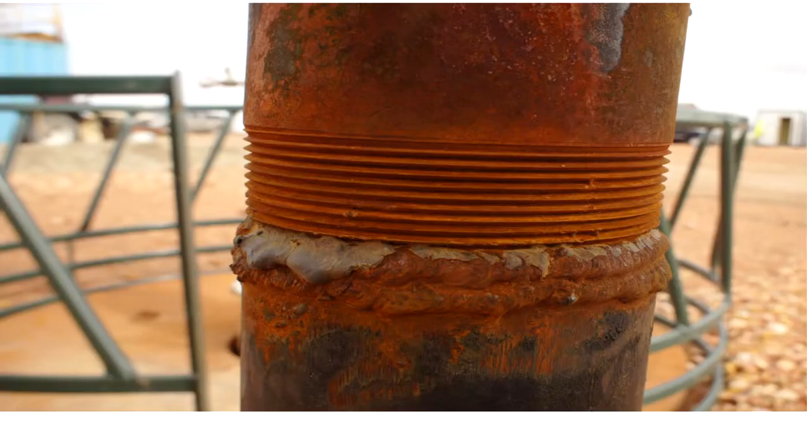This was a weld I saw at a place in Montana last year. I bought into and invested in this water well, and this was their high pressure injection line. When I saw that, I about went bananas. And why would you not want to do that? Geez, I wonder what the joint looked like.

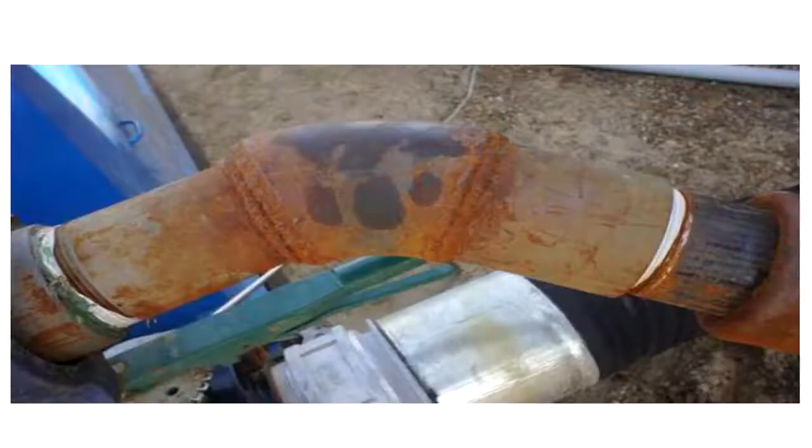You're all welding instructors. Now let's see here, what's wrong with that one? This is a 3-inch nipple going into a 4-inch, 45-degree elbow welded onto a 3-inch collar. What a nice job. Anyway, I try to throw a few of these good ones in.

My name is Larry Zirker. I worked 5 years in the oil field as a pipe welder, used to wear my funky little hat. People just don't know how to wear these hats right. I gave a few away, and the first thing they do is this to them. I said, no, you wear them poofy like this. They said, why? I said, well, in Wyoming it's always either cold or snowing. You pull it down over your ears and weld on the pipe, and it's poofy so you can protect both ears. So if somebody gives the correct answers today, I got a hat here for you. It's custom made, old school design, reversible and everything.

Retired welding engineer, 30 years with the Department of Energy, welded nuclear fuel rods. That's why I have a radiant face. But worked on airplanes, did a lot of things, lectured, taught at a couple of universities, and now I just lecture. I've been doing this.

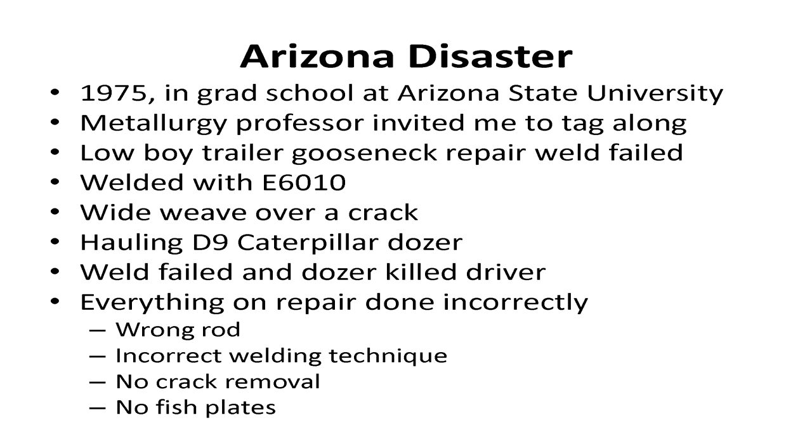I've always wanted to tell this story because I can see a teacher like you teaching a young man how to weld. He goes on to a shop, and the foreman says, hey Joe, get some 60-10 rod and go out and fix the crack in the lowboy. What I'm going to do today is try to give you everything I've got here. You can have it, you can download it from my website, I'll give it to you, but I've got slides and backup material.

That you can give a couple hours of lecture on it and train your people that when you go out and do something like a lowboy that you know has different material, but they just tell you to go out and do it. Maybe you can stop somebody from getting hurt. So let's get on with it.

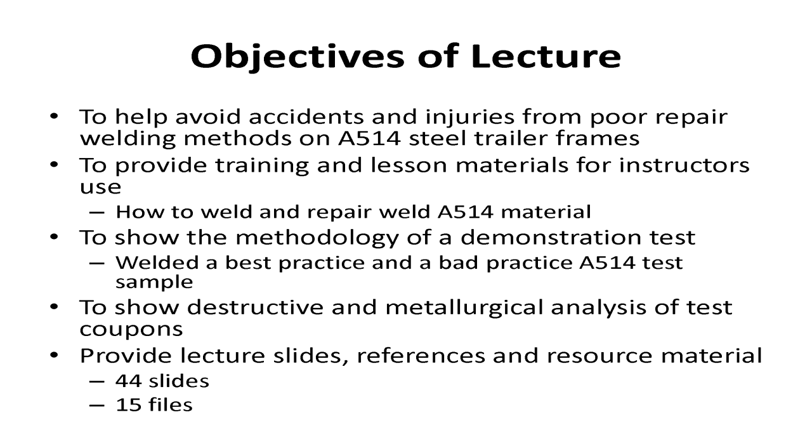So the objective is to help someone avoid accidents, to provide you lesson material. Have you ever used my stuff in your class from last year? No. Oh, the other guy did. But that's all right, that's your problem. No, maybe you might use some of this. He liked some of this stuff.

I'm going to show you how to weld it and to repair A514, which is the same as T1. We've all heard of T1, but you may not have ever heard of 514. I'll show you the methodology of how I did a demonstration test with a best practice and a bad weld, bad practice, best practice, and show you the metallurgical and destructive analysis. Boy, you're gonna love this. And then I'll give you all the slides.

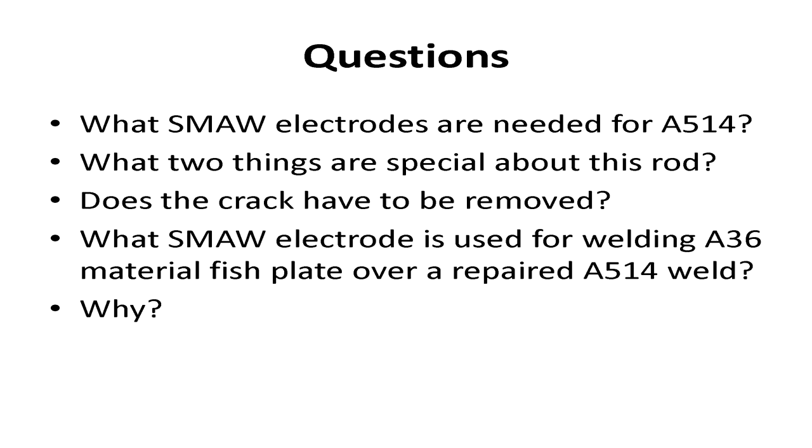You need low hydrogen rod, don't you? Yeah, well, okay, which one do I use? There's probably 10 of them, isn't there? Or 5? 7018? Okay, wrong, that's all right. 8018? No, okay, just as wrong. Just as wrong, but higher tensile strength. Yes, okay, we've got a lot of slides to go through, so let me do the answers.

Okay, you've got to match the base metal. 110, wow, this is T1. This is 110, 120,000 tensile strength material. It's got to be heated to drive off the moisture. You've got to have heated rods, free of moisture. You've got to use low hydrogen rod. Depending on the thickness, depends on the heat. You've got to totally remove the crack, because cracks will grow, and you've got to use a stringer bead.

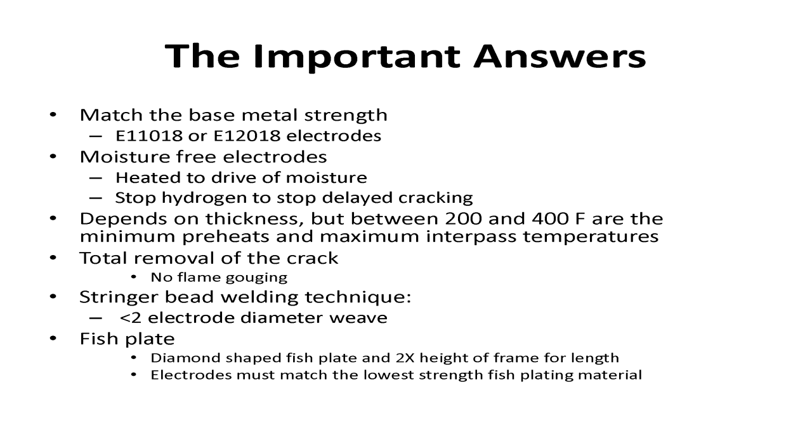No more than 2 electrode diameters wide, 2T wide weave. And when you fish plate, the fish plate should be 2 times as long as the height. On your fish plate, I have a question because I've done trailer repair, and I put them in a triangle type method, is that correct? That's exactly right. Okay, what kind of welding rod do you use to weld the A36 fish plate onto this high tensile steel with?

What did I use? What should we? Now, you're welding this onto a high tensile strength frame. What kind of rod should you use? Wrong. If you put the high tensile rod onto this A36, it'll break out the weld. You use 7018. You match the welding rod to the lowest tensile strength of the steel.

I set you up, but I wanted to do that. So let's go back. So that would be a 1020 plate? It'd be like A36, 1020. Okay, 1020, yeah, A36. So what kind of SMAW rod would you use? 7018. Okay, why? Because you match the strength of the metal.

What is T1? It's a high strength, low alloy steel, 120 KSI. If it's thicker, it'll be 110. It's commonly called T1. It's a quench and tempered steel.

Quench and— yes? How would you know that that's what the base material is? Call the manufacturer before you try to repair it? Well, how do you identify it? Sometimes you can see it written on there. Okay, but the prime thing is there'll be a big sign there. It'll say, 'Do not weld on this frame, dummy.' Well, then you know it's T1, because it's not that it was built by welders, but they didn't want an unknowledgeable person doing it.

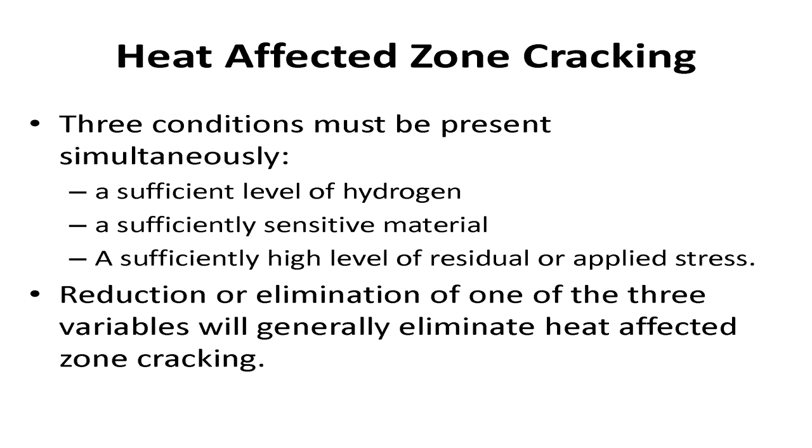The stuff you practice welding on with your students, you could probably weld it, throw it in a snowbank, and it'd probably still bend just fine.

But this stuff, consider, I had two girlfriends once. One said, I'll make you cookies. I said okay, and she made me sugar cookies: egg, flour, cooked with a little bit of sugar on it. My other one, my wife, said I'll make you cookies, and she made it with oatmeal, raisins, chocolate chips, coconut, and pecans. Well, they're both cookies.

A36, A514, both steels, but this one here's got steroids, it's got a lot of goodies in it. And you eliminate any one of these three, and you don't have hydrogen cracking, generally.

That's why we do what? Bake the electrodes. We bake the electrodes. We get rid of the hydrogen.

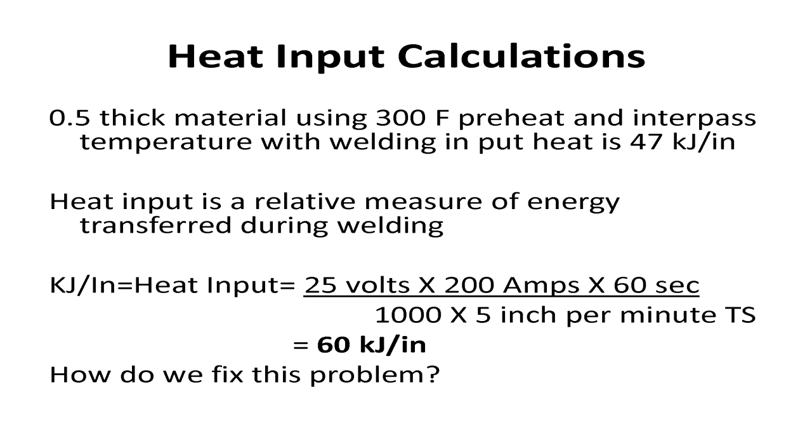Very good, you guys are good. All right, here's something. If you read the book on welding this material, it'll say - I copied this right out of a book - half-inch material, preheated to 300, interpass temperature 300, and you can't have a heat input of more than 47 kilojoules per inch. Here's the formula for it: volts times amps times seconds, over 1,000, times the travel speed. Well, when I did that, it came up to 60 kilojoules.

How do I fix that problem? How do I weld it now? My kilojoules are way too high, I got too much heat input. I do what with my travel speed? You increase it. Will that drop my kilojoules? Yeah, good question, good answer. Also, what else can you do? Smaller diameter electrode, turn your amps down, and that would get you right down to the 47.

This is something you can do with your classes. You give them this, and they should know how to multiply something simple like that. Even those, my two friends there, they're from Utah - their guys should be able to do that. Do they teach algebra in Utah? I think so, they do.

You can shorten your arc too. Okay, see, you taught me something.

More details. Now, this material is quench and tempered. That means when it's made in a factory, and they pour it out, you get those sparks, and they make these big long ingots, and they're all red, and when they get to this, they run it down through, and get it to the right temperature, they squirt water on it. So if I take 4140 steel, what they make gun barrels out of, they get them in the untempered, unhardened condition, and they make the gun barrel and the riflings, and then they temper them so they're real hard.

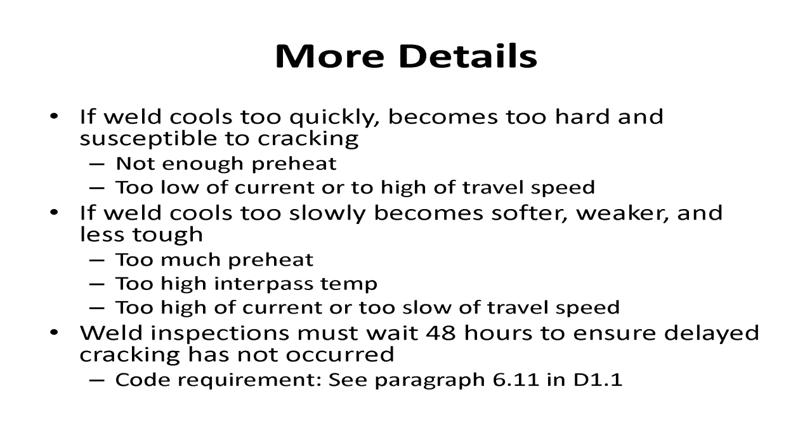If you have too much. And also the code says that you have to wait 48 hours. Why? Make sure that the hydrogen's out, so there's no cracking. That's exactly right, that's right in the code book. And so...

Okay, it's very sensitive, kind of like getting married to a redhead. If everything's right, everything's cool, but you screw up a little bit, it's hell to pay. They blow off - this is this material.

You got to have - now this is something most students don't understand - you have to have a minimum preheat. If the preheat's 75, can I preheat to 100? Yeah, it won't hurt. It's got to be a minimum of 75.

But if it's a 200 or 300 degree maximum interpass temperature, if it's 300 maximum interpass, can I have a 200?

Can I have 400? No, it's a minimum preheat, a maximum interpass temperature.

Preheat and maximum interpass temperature—most of your students will never know that until they get out in the field. That's something you can tell them. It's a balance between the time between passes, the base metal thickness, and preheat.

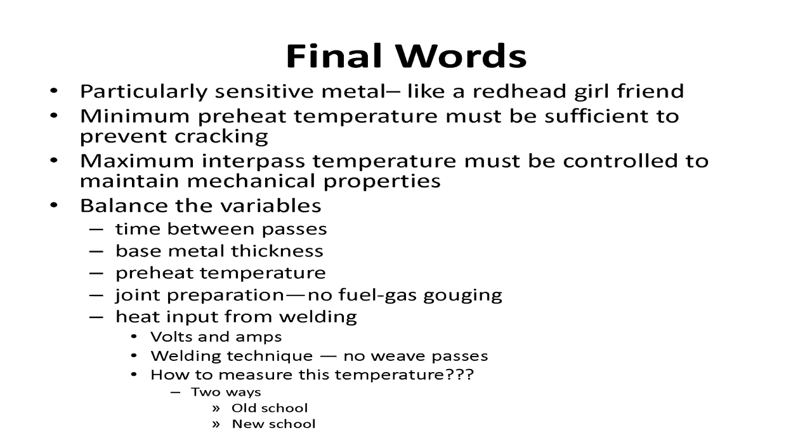Tempil stick—if you spit on it and it bounces three times before it falls off, that's 300 degrees. No, I'm just kidding. Four times, 400, right?

Where do you find information? If you get a piece of metal, say 514—have you ever heard of 514 before? How would you know how to weld it if you didn't know how to weld it? Where would you go to look it up?

Code is the very best place to go. It will tell you the welding rod, and it always tells you the mechanicals and the chemicals. Now if you can find the chemicals, what's another really good way to get a feel for this material? If you quickly do a calculation of carbon equivalent—what do you think the carbon equivalent on this material is?

I think it's 0.68. What does that tell you instantly? Mr. Army man, Mr. Marine, what does that tell you? 0.68 should be a red flag saying wait a minute. What carbon equivalent makes you start to preheat when you weld?

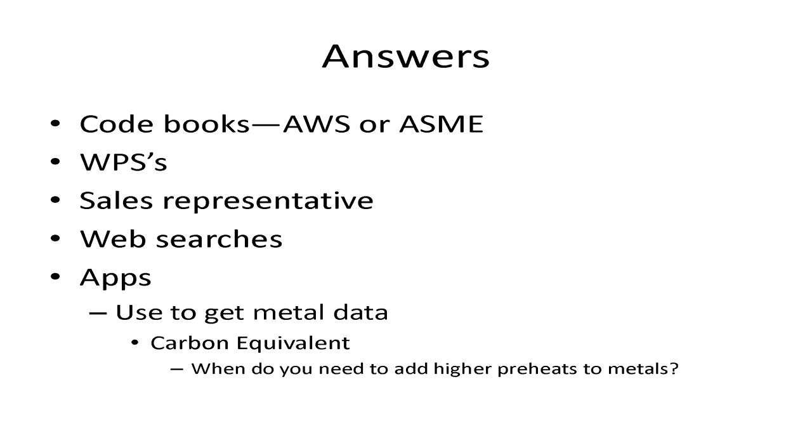Okay, this is what I did. What am I looking for, time? Over half an hour—oh well, we can fill that. Didn't mean to babble so much. What I did is I thought, okay, to do this right, I need to do a practice test.

So I went out and bought some of this steel—oh my gosh, that was pricey, it cost me $130. Then I bought some welding rod—this is really expensive too. And then having the samples cut, that was $30 a coupon. It was water jet—that was the best way to get them, it didn't come out with a plasma torch or a laser.

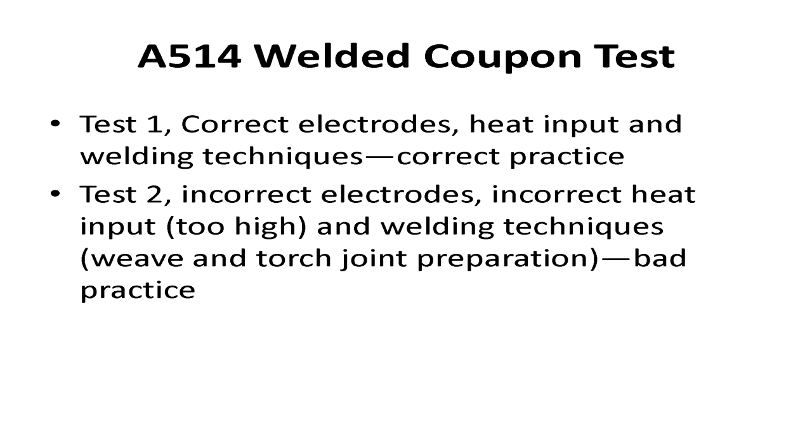It was water jet. So I welded one up correctly—right heat input, welding technique, correct practice, right rod. The other one I welded up like a young kid that didn't know any better, sent out to weld it. He'd probably take a 6010 rod to fill up the cracks and some 7018 to weld it. That's exactly what I did.

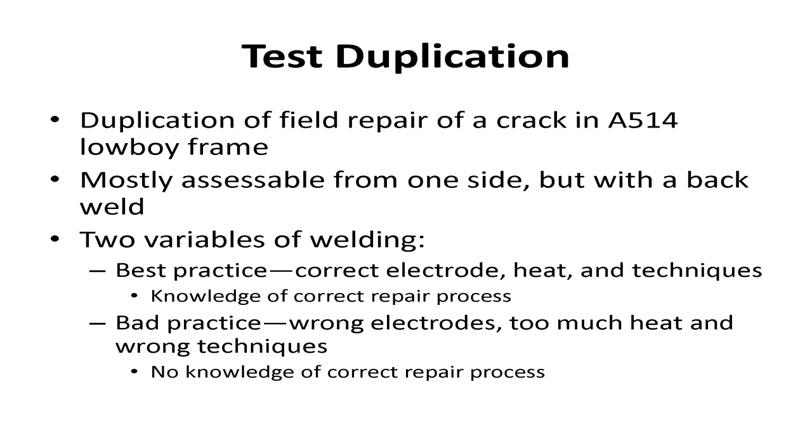So I duplicated it—I tried to make a duplication of welding a frame where I had a back weld on one side and welded it all from the other side. And there I am with my shirt tail unplugged, and you're not a welder unless you got a Lincoln. There I've got my coupon in my hand.

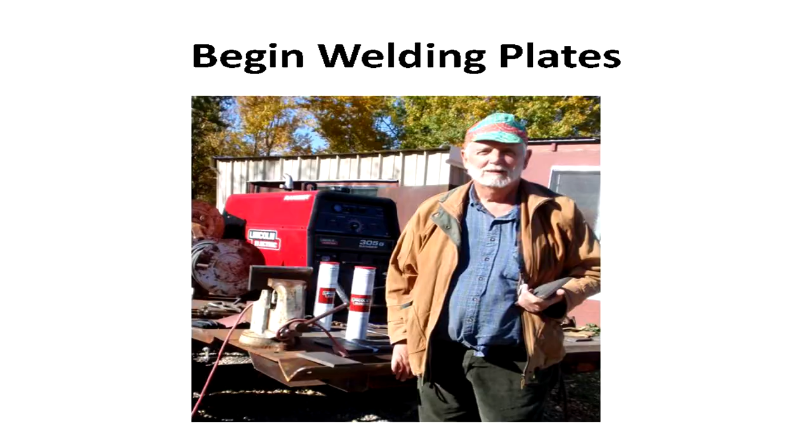Okay, here's a safety share—you got to have a safety share. The person who can first tell me what's wrong, I'll give them this. There's no guard on your grinder. That's a sanding disc, that's allowed. Ear protection? I got ear protection, it's right behind my collar, you can see it. No gloves though.

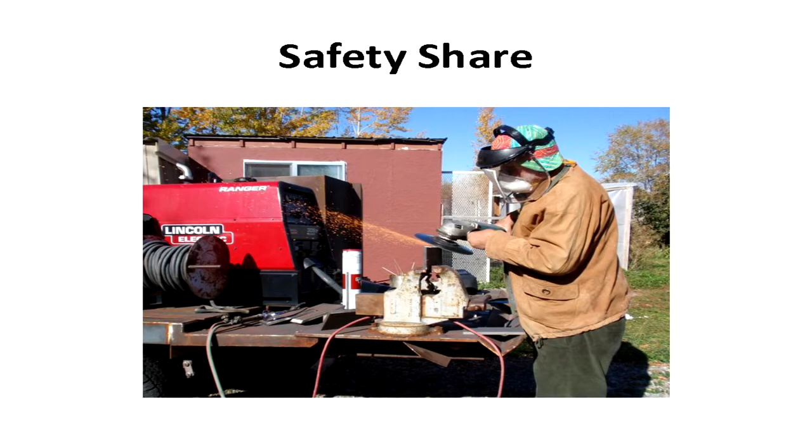Okay, that's right, I didn't have gloves on—I was sanding down my disc. Okay, there's my plates. I did an A36 plate so I could practice weld—I don't weld enough, so I practiced on that one. Then I'd run it on the A36, and then I'd run it on my good one.

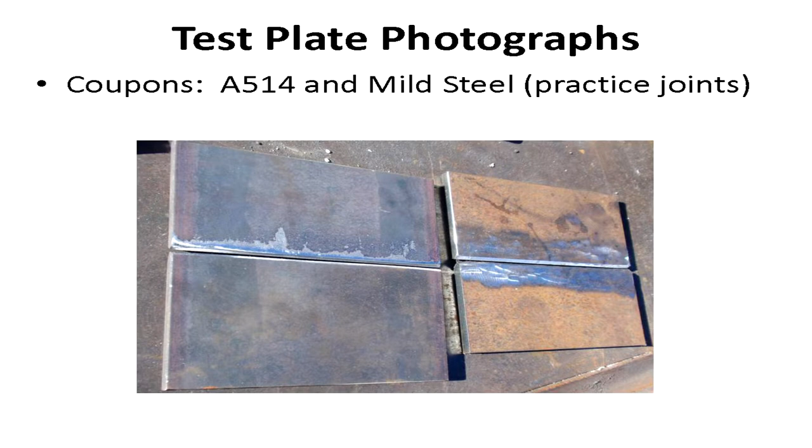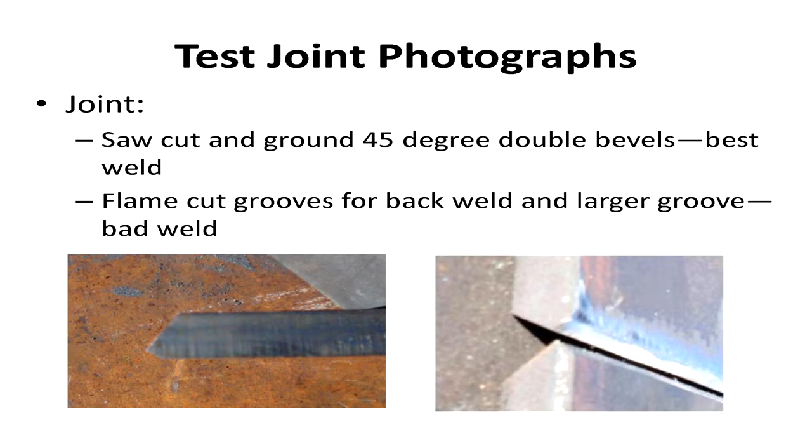This is the bevel I used, and then I flame cut the bad one. We're putting so much heat into it that quench and tempered material gets messed up - it's like taking your pocket knife and putting it in a campfire and leaving it for an hour. Because it's tempered, and you put heat into it, you're going to mess it up, you're going to anneal it. Well, that's what happens when you flame cut this material.

Plasma cut's okay, flame cut's bad. So the other one I flame cut the joint. Here I tacked it up.

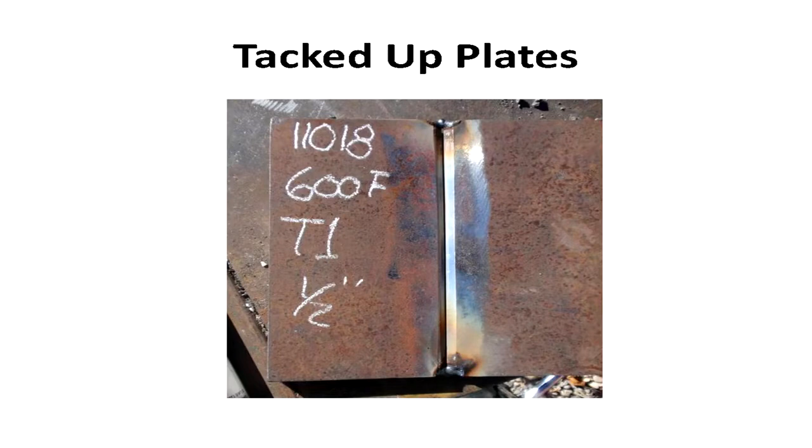Oh, look, there's my Tempil stick. Where'd I put it? Oh, always right here. There's my Tempil stick, and see it smoking? I got the right temperature.

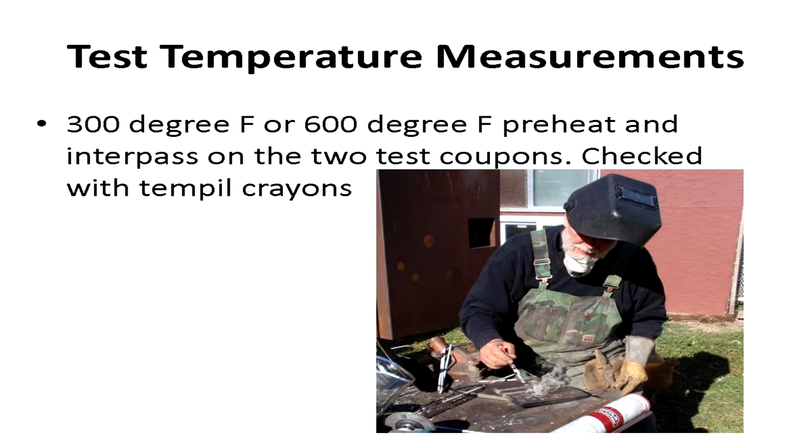And I preheated - the good one I welded at 300°F, and the bad practice at 600°F. Once I got going, it was hard, I had to wait 20 minutes to cool that other one down. I kept wanting to squirt it with water, and I just didn't think I should do that.

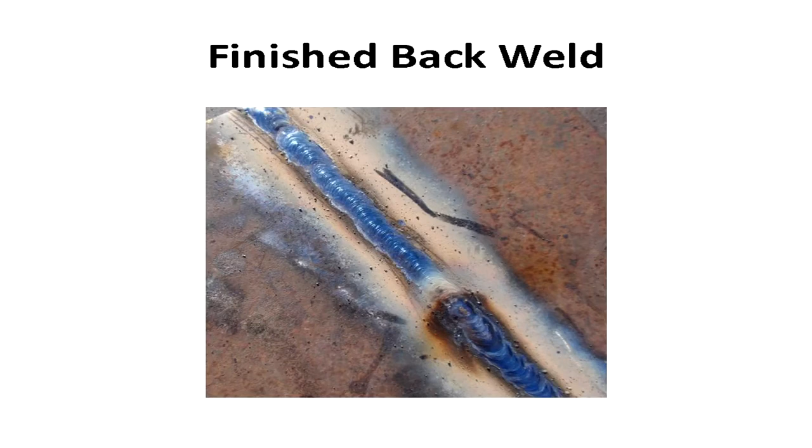There's the back weld. There's the first fill pass on the back side, second fill pass. Then I cut out these coupons out of each one of them with the water jet, and we'll show you those.

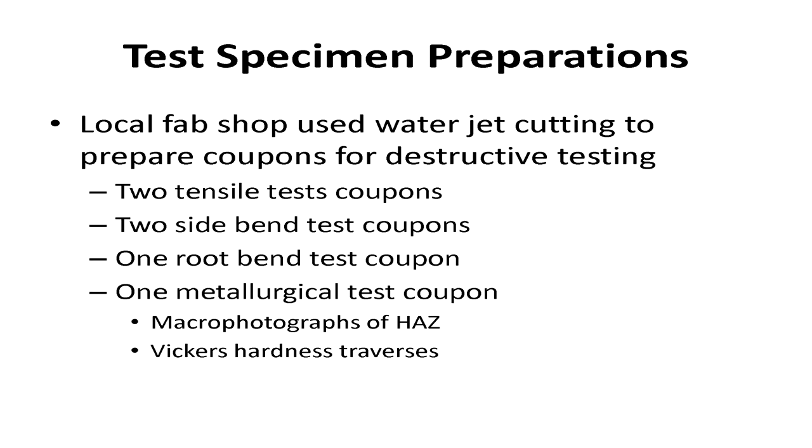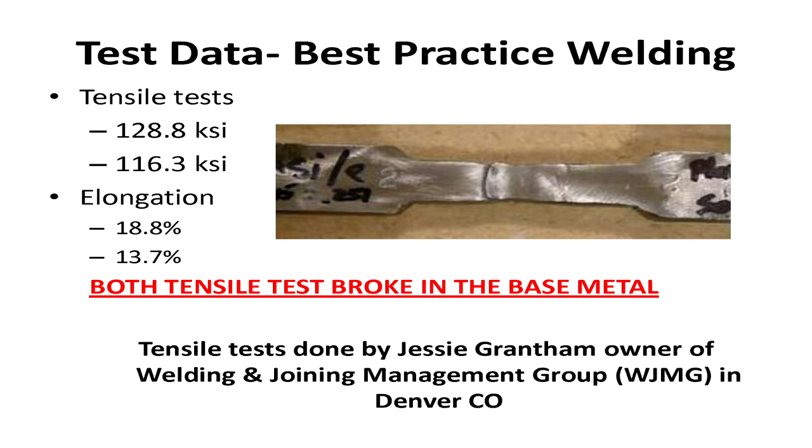128K - isn't that sweet? 116. And they both broke outside of the fusion. Elongation - I had this Welding & Joining Management Group out of Denver do my testing. Just such a good old guy, we went to school together.

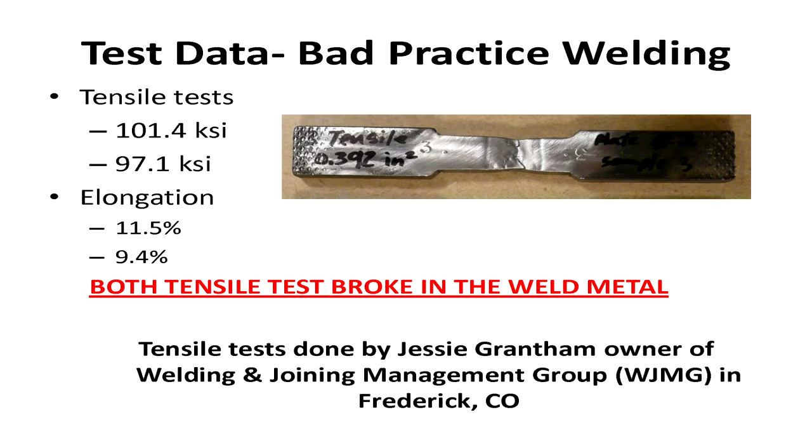The bad practice, look at the elongation. It's not that it didn't elongate, it fractured before it could stretch. I was even surprised, welding it with 7018, it still broke at 97K.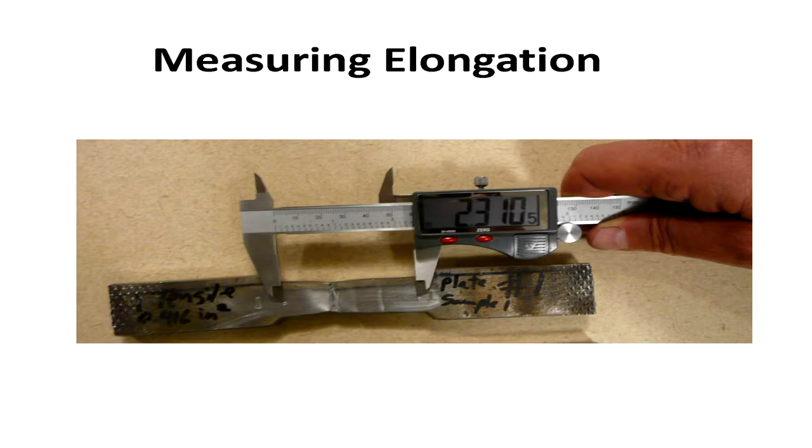Oh, this was really interesting. I used to work for the Idaho National Laboratory - that's the nuclear arm of the Department of Energy.

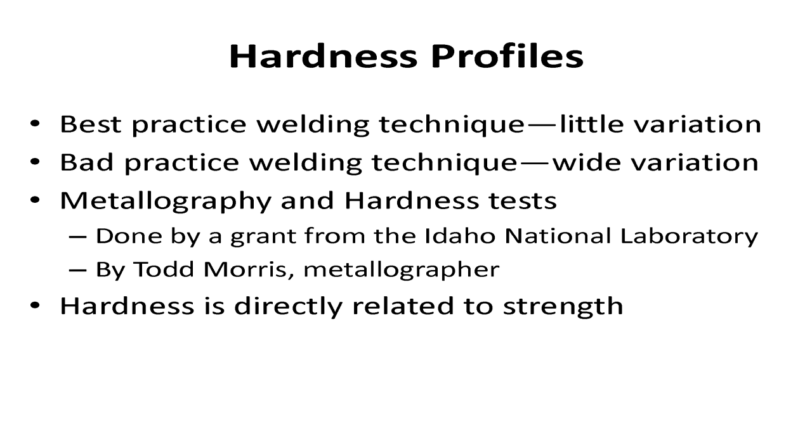And remember, they did a grant for me. I asked them, nobody in town can do it, and they said, well, we'll do it for you. I had to get somebody to give me 4 hours of billable hours. And hardness is directly related to strength, it's a direct relation to strength.

The good weld, this is really good here. Now the weld shaped like this - well, the hardness traverse was right through the center, 1/4 inch down from the top.

And you notice that this is the base metal hardnesses, and they were a millimeter apart, and there was about 18 of them I think. So this was the center of the weld, right here. This is the base metal.

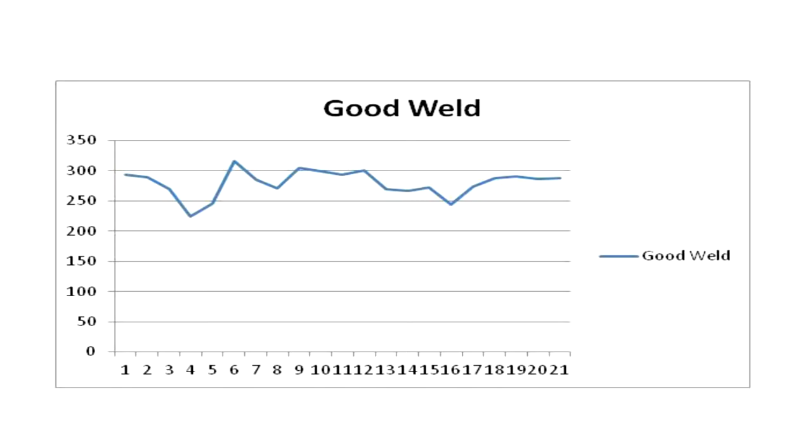The base metal got a little dip for the heat affected zone, and then the weld metal was the same hardness as the base metal. That's what it got - quenched just fast enough to cool, to harden a little bit, but it wasn't too hot to anneal the material.

That is the secret. Now the bad weld really had a dip - there's base metal, it had a real dip here, come up, had a little spike for some reason, and then the weld metal was really low and up, and then it hit a spike on the heat affected zone.

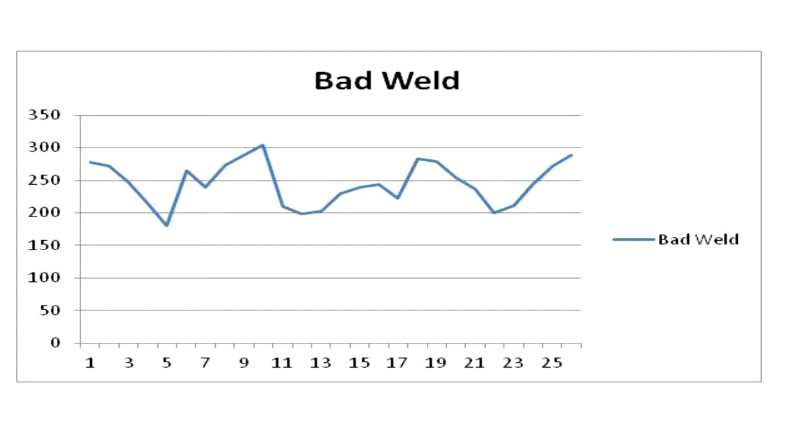Now we'll show you why this happened here in a minute. Put them, superimpose them - heat affected zone is right here.

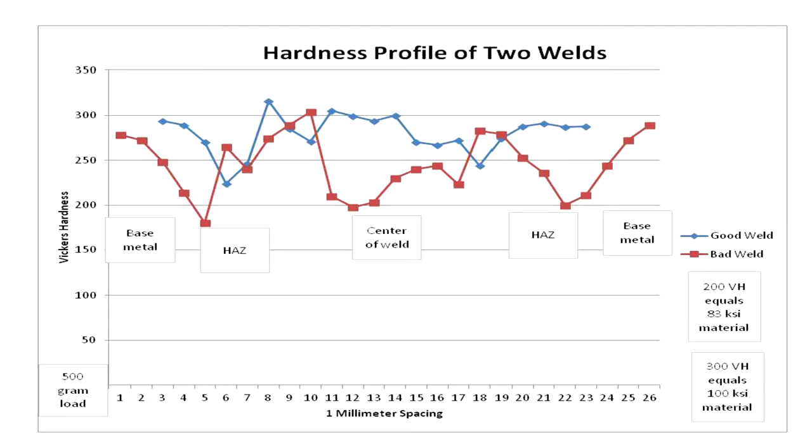Now, oh, I brought my sample - you guys will like this, you can look at it. If you'd like to pass it around, just don't touch it with your fingers, or my buddy will dislocate your shoulder over there.

And then there's something really neat that nobody will notice, but you look at it for a second - all right, there it is, right? It was taken, the hardness test was taken right to the center, just like that.

Now notice, see the heat affected zone here? Nice even heat affected zone. See the heat affected zone here? It's about twice the width of that.

Well, I had twice the heat input - big weld. And you can see how big and gobby this weld was. It put a 6010 root in it and had to grind it down, and big weave passes.

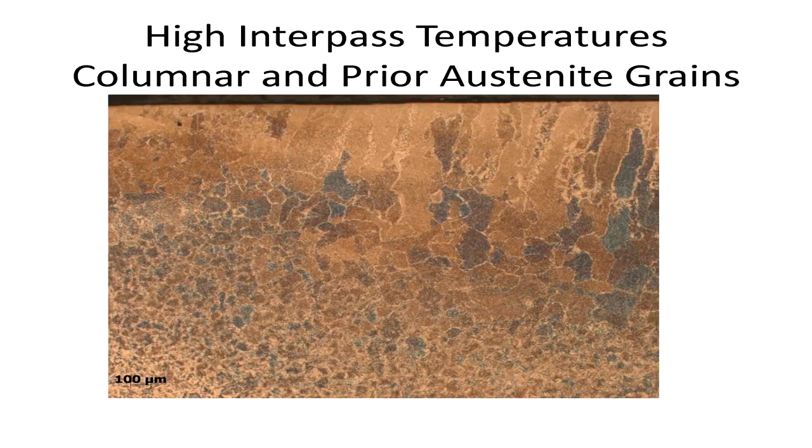Now, this is the base metal down here. This is what the microstructure of the base metal looks like. What's this called right here? That's weld metal. That's weld metal. A weld, these columnar grains.

If you were to look at them closely, they should be martensite. But this is at 50X. If you were to see it at 200X, it would probably show up as martensite. However, this is something interesting: when the weld metal melts onto the base metal, which is right here - there's your fusion line right there - it always grabs onto an existing grain. It likes to grow in that grain - preferential grain growth.

And that's why these will always be attached. If you look real careful, they're always attached. For some reason this one attached down here, onto a non-melted grain, and they grow. They usually grow toward the heat - they always curve to the heat source. This is right close to the top, and you don't see it.

Now, how hot - if I were to come out here an inch or so, how hot would that be? Or 3 inches? How hot would the base metal be 6 inches away from that weld? Give me a guess. Whatever your preheat. Yeah, 100 degrees or whatever, or room temperature. Depends if it's good practice or bad.

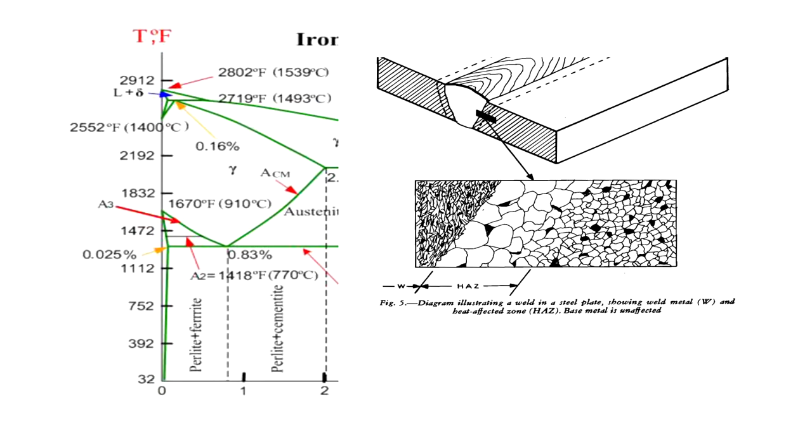And here we go. This is everything you guys weld—probably 99% of your materials is going to be perlite and ferrite. It's going to look just like this. A little perlite, carbon's out here.

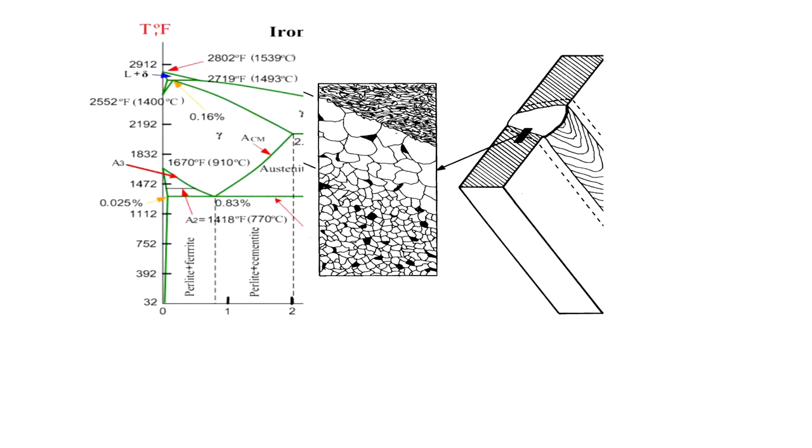What's the percentage of carbon in those things? For a hat, who can tell me what percentage of carbon is in those perlites? 83, that's right. Do you want a hat? You can have that.

All right, this is what we're going to do. Just everything you practice on in welding, pipe coupons and plate coupons—it's all going to be here because it's always going to be about 0.2, 0.3% carbon. It's going to be right over about right here, and it's all going to be right here.

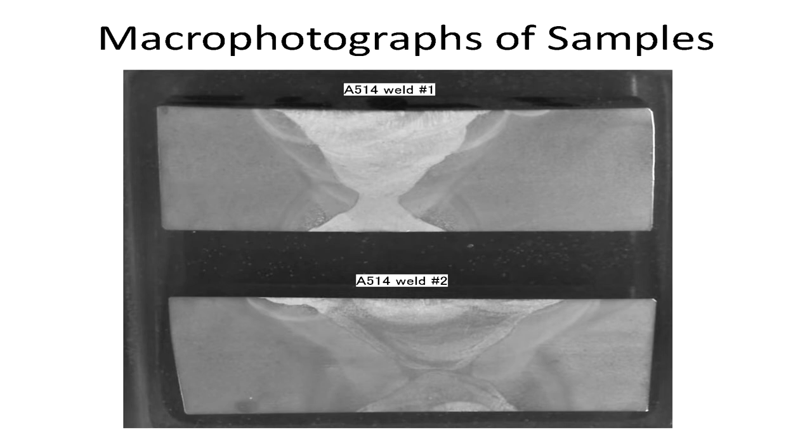And what's the biggest hardening element, chemical element, for hardness? What chemical element or material contributes the most to the hardness of anything? Carbon. Carbon does, okay? High carbon steel—drill bits are high carbon steel.